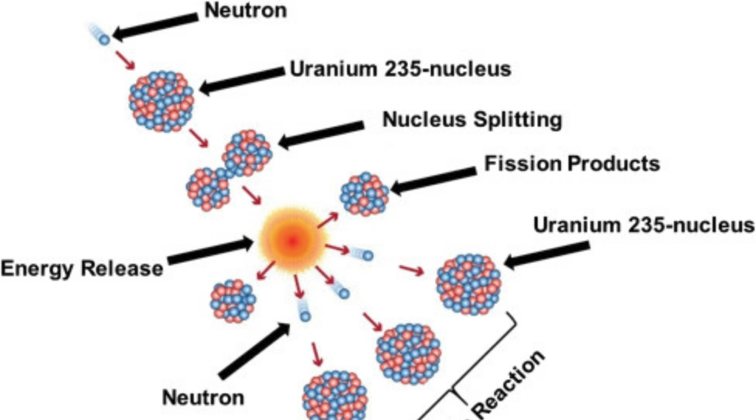Nuclear reactors break down these bonds by shooting neutrons at heavy atoms like uranium, which in turn release more neutrons, which break more bonds, and so on. This process releases an incredible amount of thermal energy, which can be harnessed. This thermal energy heats water into steam, which spins a turbine, which generates electricity. So, SMRs and conventional nuclear reactors both use nuclear fission to create electricity, but how are they different?

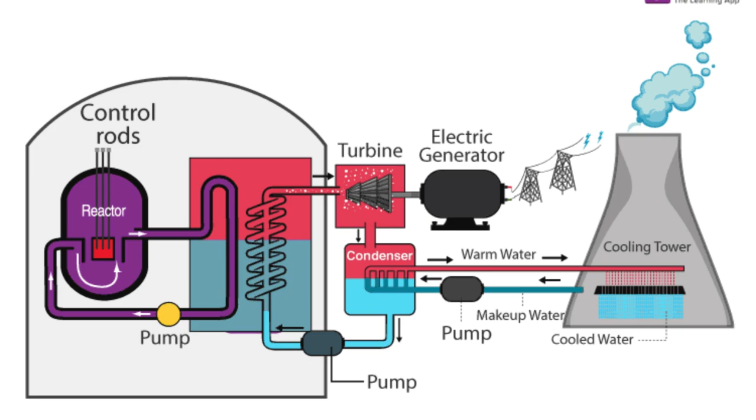For starters, they're much smaller. SMRs require only a fraction of the land needed for a conventional plant. SMRs need about 65 acres compared to the nearly 3,000 needed by typical power plants. Also, they're modular, meaning they can be built in one location and transported to where they will be deployed. This is a huge advantage over conventional plants.

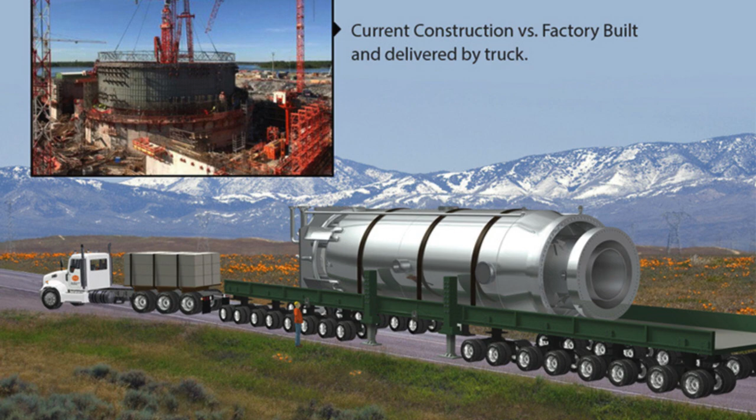It saves a lot of time and money to produce reactors in a central location and then distribute them to where you need the power. Conventional reactors can take decades of planning and construction before they are operational.

SMRs have smaller electric production capacities than conventional reactors, typically anywhere from 60 to 300 megawatts, compared to the roughly 1,000 megawatts of a conventional reactor. However, because of their design, SMRs can be coupled together easily and scaled up. X Energy is planning to deploy 12 reactors in Washington state for a total of 960 megawatts of electric production.

To further explore the differences between SMRs and conventional nuclear reactors, we'll take a quick history lesson. The first reactors, now known as Gen 1 reactors, were developed in France in the 50s and 60s. They used natural uranium and are now obsolete. In the 60s and 70s, the United States and Russia developed and deployed a number of different nuclear reactor designs. These are called Gen 2 reactors and account for 2/3 of reactors in use today. They use fission to heat water into steam and turn a turbine to create electricity.

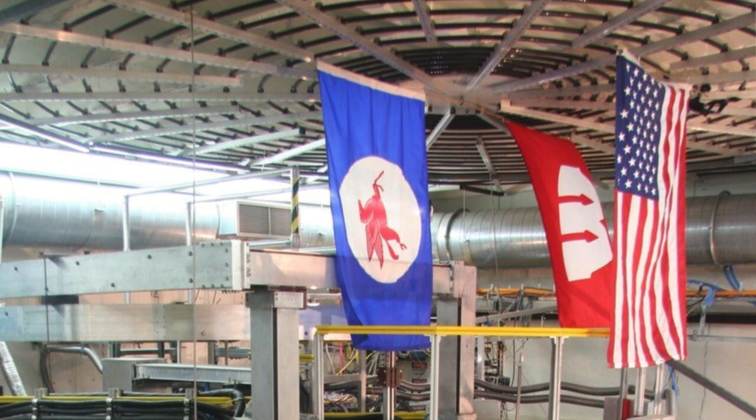They also typically use boron, a very boring element, to control the reaction. When engineers want the reactor to stop or slow down, they insert rods made of boron into the reactor to cool the reaction. The reactor housed in the engineering building at UW-Madison, the Chernobyl reactor that exploded, and the Three Mile Island reactor in Pennsylvania that experienced a partial meltdown are all Gen 2 reactors. Gen 2 reactors in nuclear power plants often generate up to 1,000 megawatts of electricity.

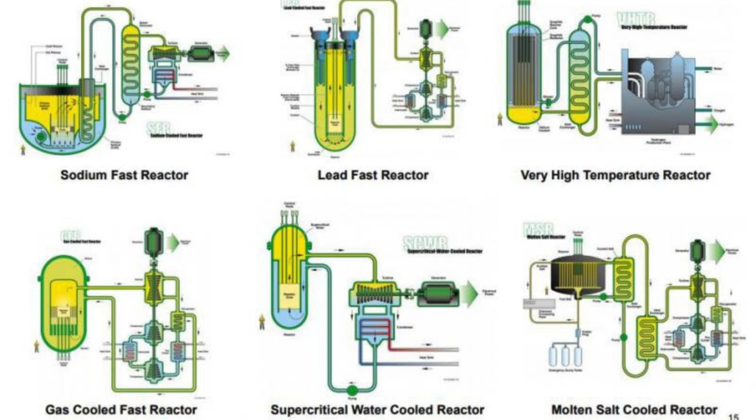Gen 3 reactors are very similar to Gen 2, but they use uranium more efficiently and are believed to be safer than Gen 2 reactors. Now, finally, SMRs. SMRs are Gen 4. There are a few Russian models that use Gen 2 or Gen 3 technology, but by and large, SMRs are Gen 4. There are over 80 SMR designs in various stages of development, but a popular one, and the one used by X Energy in its flagship reactor, the Xe-100, are known as high-temperature gas-cooled reactors.

They use coated fuel particles, such as tristructural isotropic particle fuel for their fission, which is not only much safer, but much more efficient than conventional uranium fuel. So far, all HTGRs use helium gas for cooling. Helium is stable and does not become radioactive when exposed to radiation. Let's take a closer look at the fuel, specifically the fuel used by the Xe-100.

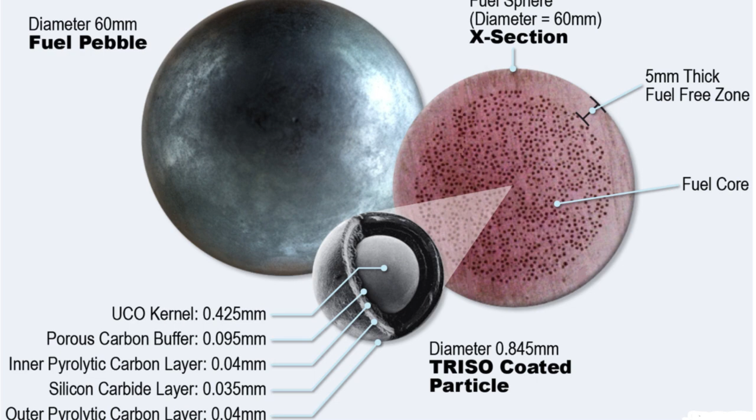Encased in a billiards ball-sized sphere of graphite, known as a fuel pebble, are 19,000 tristructural isotropic, or TRISO, particles, each with a microscopic kernel of super-enriched uranium surrounded by 3 indestructible layers of carbon. These layers of carbon contain 99.99% of fission byproduct, i.e., radioactive material. TRISO particle fuel doesn't require a containment protocol because the fuel itself is the containment.

More than 200,000 fuel pebbles are cycled through the core of the Xe-100 like gumballs through a gumball machine. It's designed to operate for 60 years without the need to be refueled. Conventional reactors need to be refueled every 1 to 2 years.

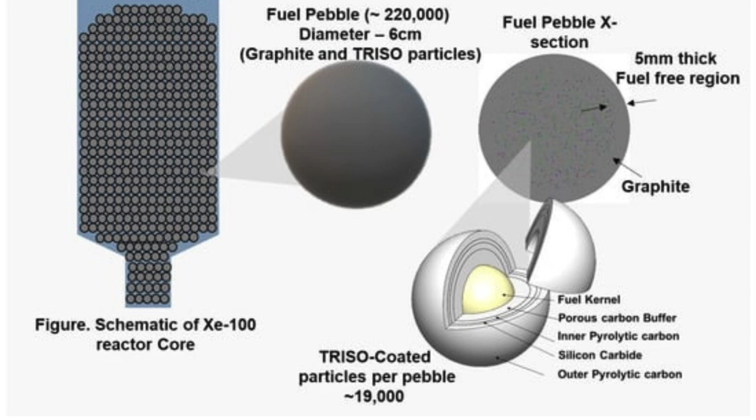How do SMRs fit into the discussion on renewable energy? First, they are a zero-emission form of electricity production. Second, unlike solar and wind, they have a consistent power output and can be scaled up or down as the grid demands. Third, SMRs use a fraction of the water of most forms of electricity production.

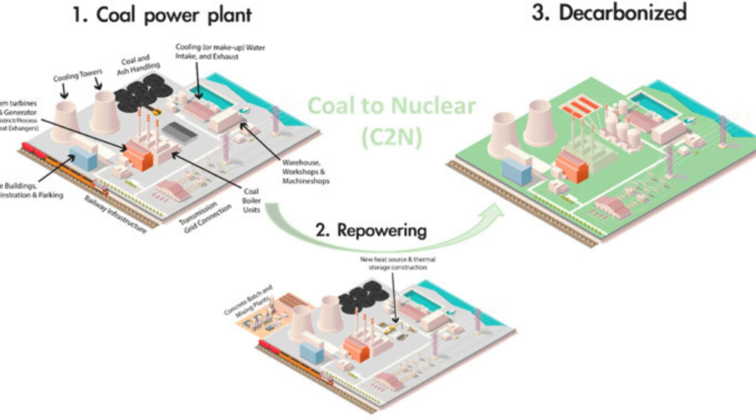Fourth, there's a lot of power in nuclear energy. Nuclear could be the backbone of the grid, readily replacing coal and natural gas, while greener energy sources continue being researched. SMRs are ideal candidates to directly replace coal in existing power plants. Because of their size and transportability, a power company could refigure their plant to be powered by an SMR for a fraction of the cost of developing a new plant.

Further, there is a classification of SMRs known as microreactors. These are reactors that have a power output of anywhere from 1 to 20 megawatts of electricity. What are they good for? Well, a lot actually. 5 to 10 megawatts of power is enough to power a small city or town. Imagine if the thousands of rural communities in the US didn't need electricity from a power plant hundreds of miles away, and instead could be powered by a local microreactor.

Also, factories that need a lot of electricity could ostensibly be powered by one microreactor for years, rather than draw huge amounts of power from coal or gas power plants. Microreactors could also be used on huge shipping vessels, which use an insane amount of petroleum to move goods across the oceans. The military is already using Gen 2 reactors in most of its aircraft carriers and nuclear submarines. Why not bring safer and more efficient reactor models to the commercial realm?

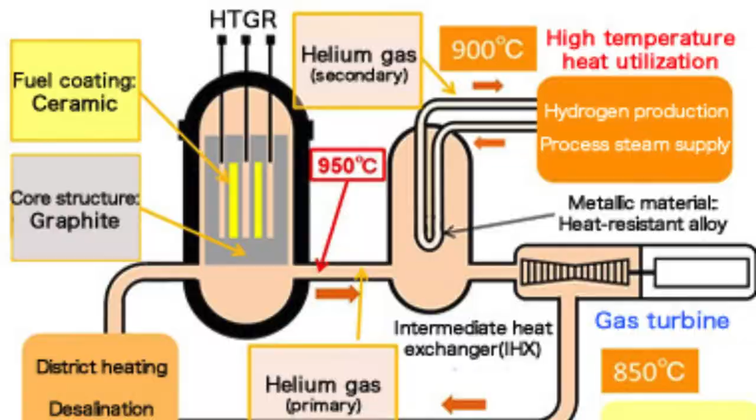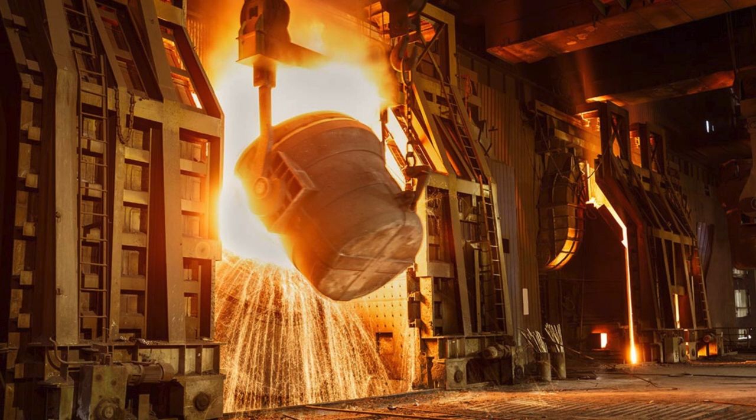Lastly, there's one more specific thing that SMRs can do to help lower emissions and get us away from fossil fuels. Keen listeners will remember that the XE100 is known as a high-temperature reactor. What does that mean? Well, certain industrial chemical processes, like the production of steel, glass, cement, or ammonia, require a high amount of heat. Most chemical reactors use natural gas to accomplish this. So while electricity production is important to achieve zero carbon emissions, we also need to find out how to get things really hot without using fossil fuels.

Enter the XE100. It can withstand temperatures up to 750 degrees Celsius, meaning an operator can allow it to get very hot and then use that heat in chemical processes.

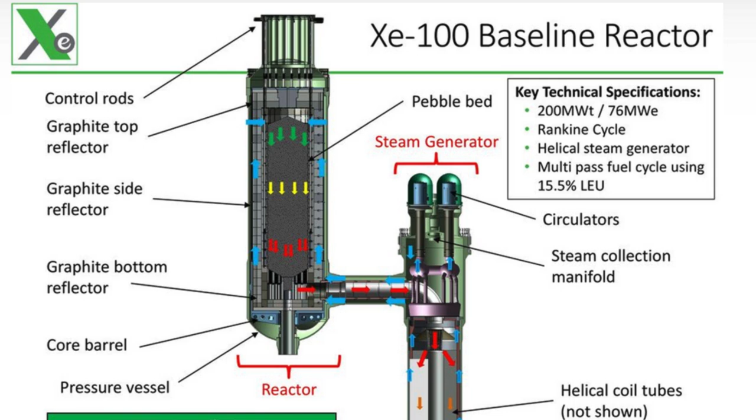X-Energy was founded in 2009, but sprang into relevancy in 2016 when it was awarded a $40 million grant by the Department of Energy to participate in its Advanced Reactor Demonstration Program. Since 2016, X-Energy has received hundreds of millions of dollars more to continue research and development of advanced nuclear reactors. In 2019, Clay Sell, a former Deputy Secretary of Energy under the George Bush administration, was appointed X-Energy's CEO. In 2022, X-Energy began construction on an enriched uranium manufacturing plant in Tennessee.

In 2023, they partnered with Dow Corporation and selected a site in Texas for deployment of their first small modular nuclear reactor, the XE100. They also partnered with Energy Northwest, and chose a site in Washington to build a series of modular reactors that are planned to generate a total of 960 megawatts of electricity. They expect the first reactor to be online by 2030.

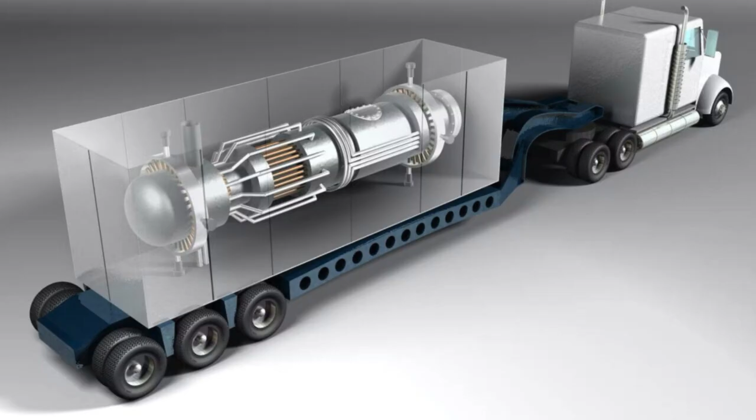Furthermore, they received $17 million in funding from the Department of Defense to develop a microreactor, the XE Mobile, to be deployed in remote military bases. X-Energy hopes to develop the reactor for use in commercial applications, such as powering factories, small to medium cities, or use in transport reactors, such as the ones found in nuclear submarines and aircraft carriers.

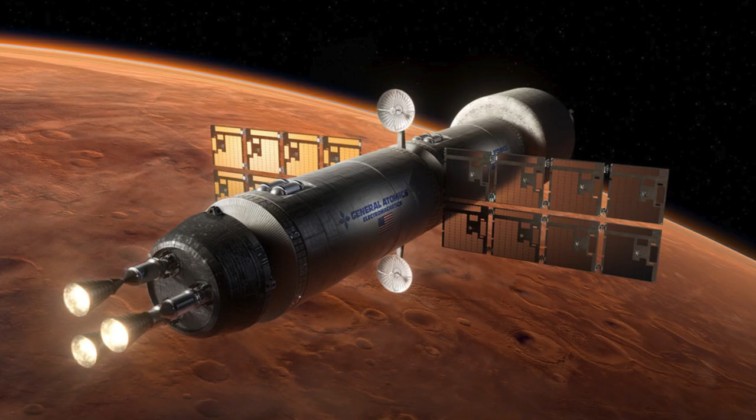Still in 2023, X-Energy was selected to develop a nanoreactor for use in spacecraft. A 40-kilowatt design was submitted to the Joint Emergent Technology Supplying On-Orbit Nuclear, or JETSON, program under the Air Force Research Laboratory. In October of 2024, X-Energy announced a large investment from Amazon, who committed to paying for the first 4 reactors being built in Washington state.

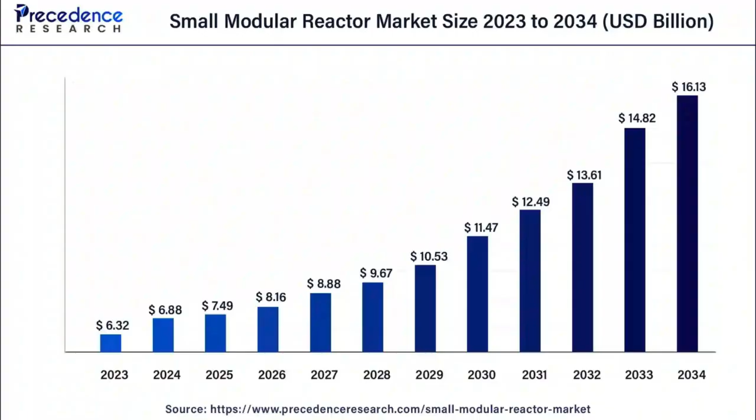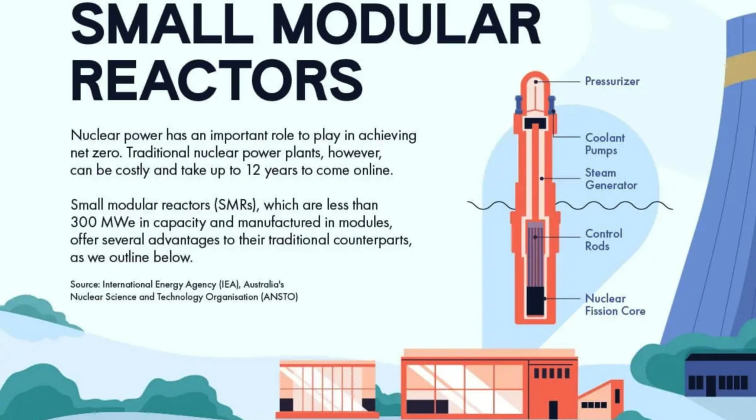In conclusion, the future of nuclear power is bright and continues to grow. Companies like X-Energy are blazing the trail of safer and more efficient methods of nuclear power production. In order to achieve emission-free electricity, it is imperative to pursue nuclear energy. Small modular reactors like the XE100 promise a safe, clean, and efficient form of energy. I, for one, am thrilled about the future of nuclear power in the US, and I hope you are too.